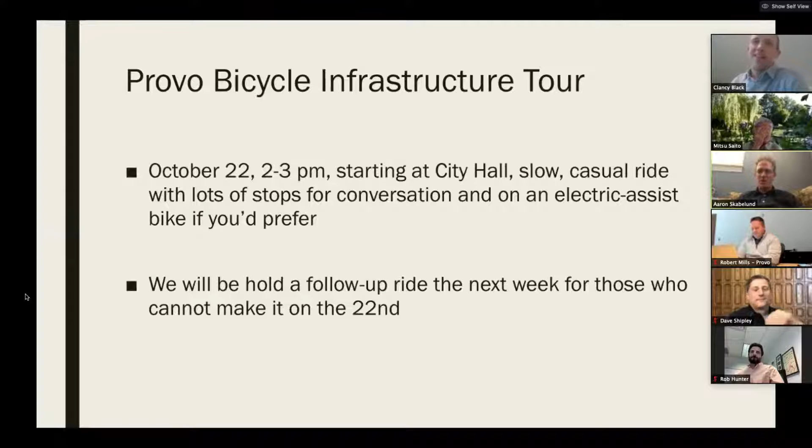Clancy, do you want to endorse this ride since you've experienced it? I actually don't know if I've been on the organized ride. I've been on all the roads you tour regularly on my own. Okay, so I will endorse the activity for sure. It's worth seeing on a bike. I know we've talked about you participating, so I hope you can join us this time. If you need an excuse to go get some fresh air on a beautiful fall day, this is your chance.

I think it's important for us to agree on the desired outcome for 200 East. What is the ultimate vision? I have a number of quotes, and anything you see in quotes comes from a document commissioned by the city from a group of consultants. This document is called the Provo 200 East Bicycle and Pedestrian Improvements Design Guidance. I'm going to take a moment to read these opening paragraphs, and I hope that we agree as a bicycling community, as neighborhoods, and as city officials, and as an advisory committee about what our ultimate vision is, because if we don't agree on these things, we're not going to get there.

So the importance of a low stress bicycling network, which 200 East is a part of. Low stress bicycle facilities like bicycle boulevards, that is 200 East, shared use paths, think of the Provo River Trail, separated bike lanes, no longer the future Bulldog project but the Cougar protected bike lanes, appeal to a more diverse cross-section of the public than conventional on-street paint-only facilities like bike lanes. For example, 700 North, 800 North, I'm sure you're familiar with these, where the only separation between the bike lane and traffic is a line of paint, not much space at all.

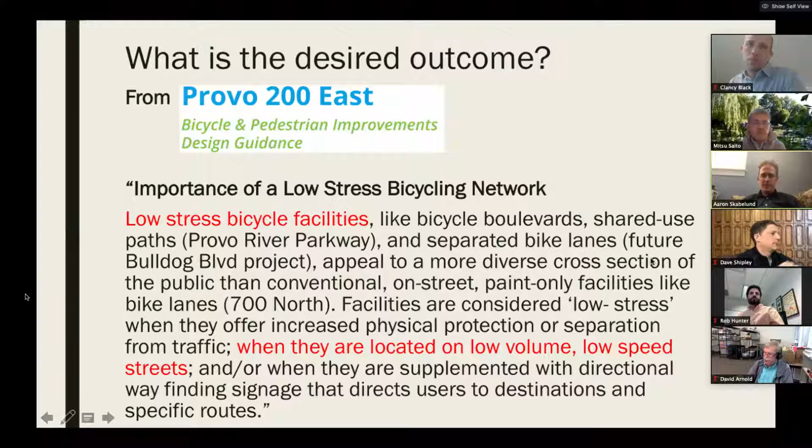A majority of the public would like to walk or ride bicycles, but are discouraged from doing so by perceived safety concerns, lack of facilities, or a lack of knowledge about where the appropriate facilities are located. Surveys nationally show that 50 to 60% of people say they would ride a bicycle more, or start riding, if they had access to facilities that provided more separation from traffic or were located on roads with lower traffic speeds and or volumes.

Additionally, evidence has shown that increasing the number of bicyclists on the road improves safety for everyone. So this is a win-win for all users of our public streets. Cities with high bicycling rates tend to have lower crash rates. Traffic calmed on-street facilities also create a better pedestrian experience by reducing traffic speeds, volumes, and possibly turning conflicts.

So I am going to assume that we agree that this is the ultimate outcome, the desired outcome. If that is not the case, then we need to have a discussion about that.

How does it reduce turning conflicts? I'll give you an example of this, for on 700 North and 200 — let's see, 700 North and 300 South. Watch for that when we get there. In some ways, at those particular intersections on 200 East, it completely eliminates turns, so there can be no conflicts if there are no left-hand turns. When we get to that point, if you still have a question about that, please let me know. Does that help?

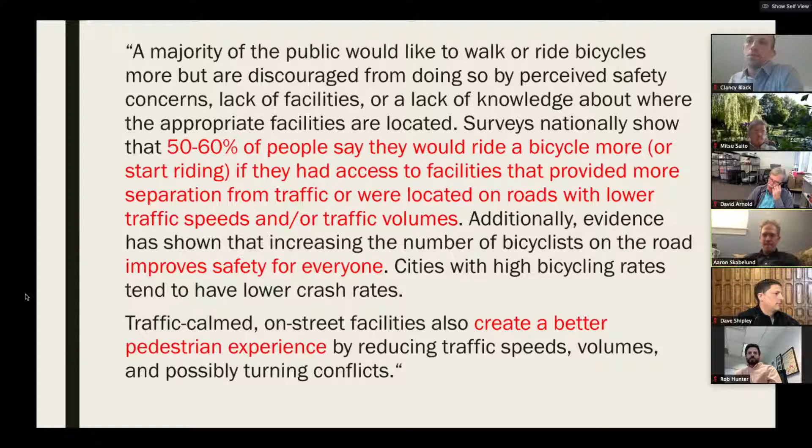Okay, so let's talk about what has improved on 200 East, assuming some familiarity of the committee with 200 East. It was identified as an ideal route from the FrontRunner station at 600 South up to the BYU campus, and to points in between. That's why the bicycling community, the neighborhoods involved, and the city itself came to a consensus that this was an ideal location for a bicycle boulevard, or alternatively, a neighborhood greenway. So what's improved over the last few years that has made this route so much better in some ways?

First off, the city over the last few years has installed these curb extensions. On the left, you can see a photo of this — I think it's 400 North on 200 East. You can see a photo from 2007, and a photo of what it looks like at the beginning of this year.

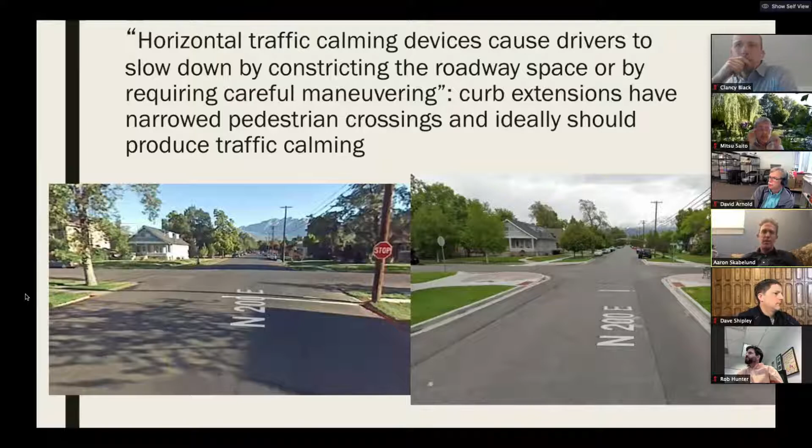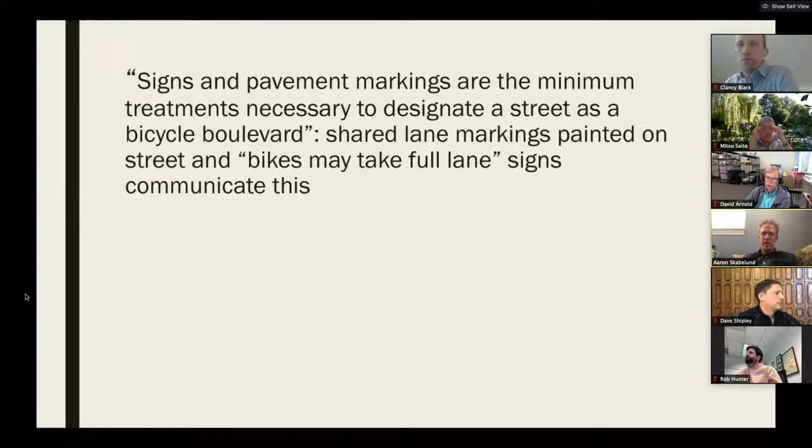Also, signs and pavement markings are the minimum treatments necessary to designate a street as a bicycle boulevard. As part of this project of building these curb extensions, the city also painted what are called sharrow markers, or shared lane markers, on the street, and posted signs mid-block going north and south indicating that bikes may take the full lane. This has helped achieve the recommendation made in the design guide.

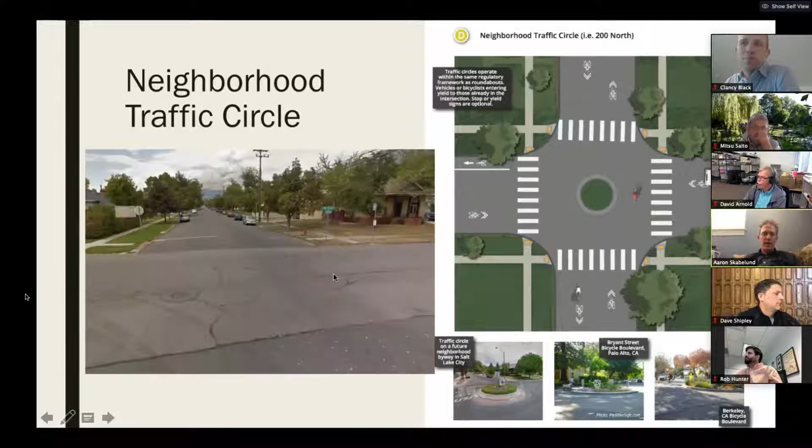Then also, the design guidance recommended that a traffic circle or mini roundabout be installed at 200 North on 200 East, and it provided some examples of what this might look like. This is what that intersection looked like before, and this is what it looks like now. Other than these photos and a little bit of text on this particular page, the design guide didn't say much more about what this should look like.

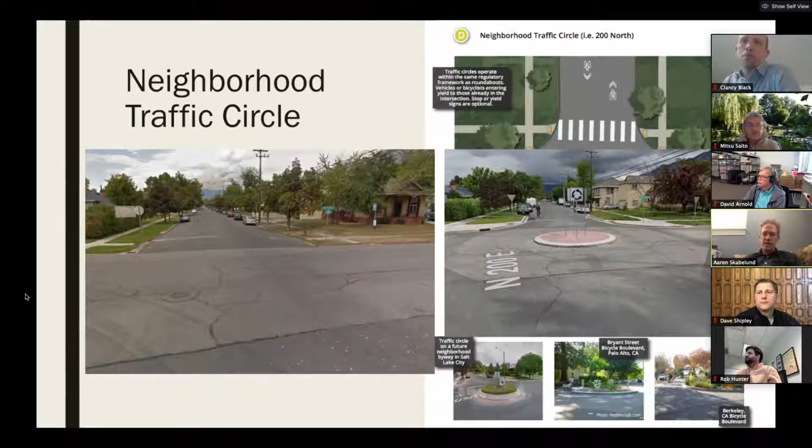Also, the guidance that we received says that 200 East is great if we develop it in this way, but it really won't realize its potential unless we make it part of a wider network.

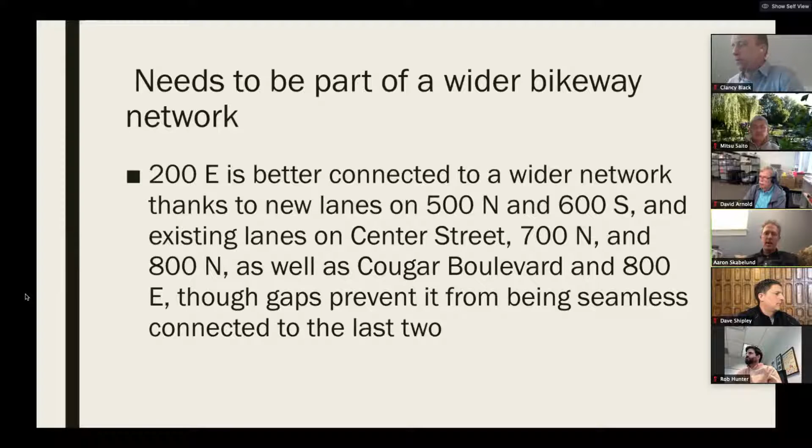In the last few years, new lanes have been installed on 500 North and 600 South, and there were also existing lanes on Center Street, 700 North and 800 North. We also have new lanes, or another bicycle boulevard, over on 800 East. But there are gaps between these routes and these new lanes, so it really needs to become part of a robust, interconnected network of bikeways.

So what remains a problem? I'm already kind of getting at that with those final comments. So let's take a look at target motor vehicle volumes. Ideally, these on a neighborhood greenway should range between 1,000 and 3,000 vehicles a day.

I don't know what they are. I don't have this data, and I hope Public Works can shed some light on this. We're certain, to speak to that earlier question, that the

traffic volumes have gone down, because on 3rd South you can no longer make a left-hand turn when going west onto 200 East. And on 700 North, thanks to the UVX project, there is an intersection like this that also prevents not only left-hand turns, but also, as you can see from this photo on 300 South, it prevents through traffic.

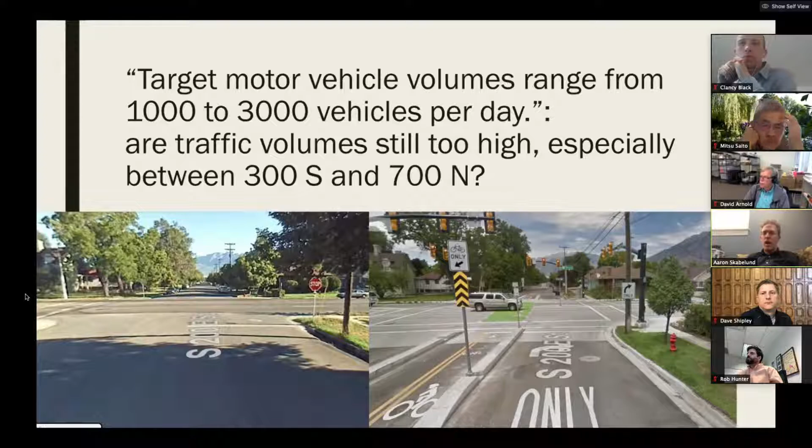But in the middle, between 300 South and 700 North, you have 10 blocks that are largely unrestricted. I suspect, and anecdotal experience shows, that traffic volumes there have not fallen all that much. I'm hoping Public Works can shed some light on this, and if they are too high still, what are we going to do?

Another goal of a neighborhood greenway is not only to decrease traffic volumes, but also to decrease traffic speeds. Ideally, the 85th percentile should be below 22 miles per hour.

The recommendation of the design guidelines is that the width of the streets between these curb extensions should be 20 feet, and if there were parking on both sides at this intersection, it could be 28 feet. The widths of the street here are actually 28 feet, so they're 8 feet wider than they need to be.

That means the lanes are 14 feet wide. So it should come as no surprise, and this data was provided to me by Jared Penrod nearly a year after these curb extensions went in, that the speed on this street has only decreased 1 mile per hour to 26 miles per hour, which means it's still faster than the posted speed of a residential road. So we're not where we need to be.

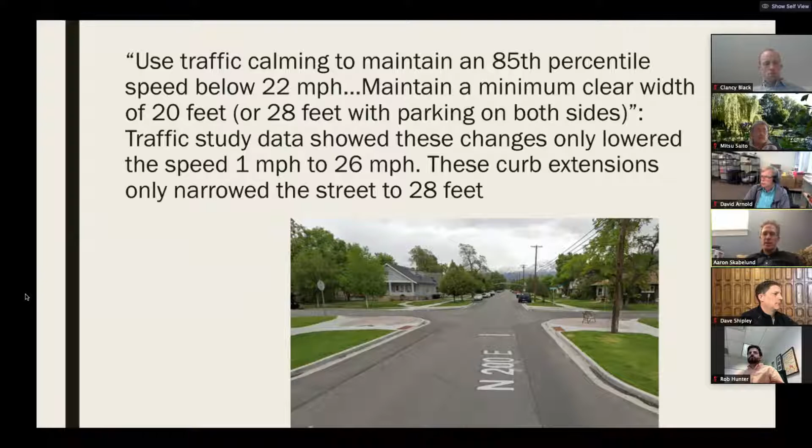It should come as no surprise that most people on bicycles, even experienced bicyclers, are not comfortable taking the lane when traffic speeds are this high. So something needs to be done to address this issue.

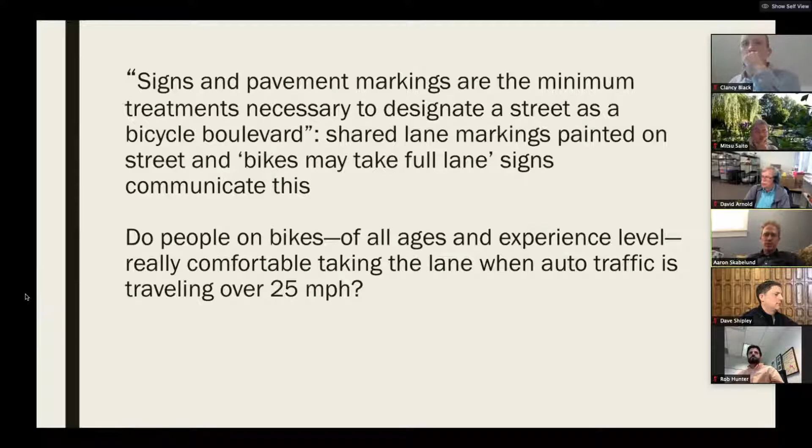I've already talked about this, that despite the shared lane markings and the signs that say bikes may take the full lane, people on bikes, particularly of all ages and experience levels, still are not going to feel comfortable treating this street as a neighborhood greenway or a bicycle boulevard. So that's a problem that lingers.

Also, the neighborhood traffic circle. The lanes around that traffic circle are 22 feet wide. I don't know what the prescribed width is; that wasn't in the design guide.

But anecdotally, from both the bicycling community and people in the neighborhood, we've been told again and again that that traffic circle feels dangerous. Just a few weeks ago, it was reported on the Joaquin Neighborhood Facebook page that there had been a car-to-car collision, and that one of the cars had gone over on its side.

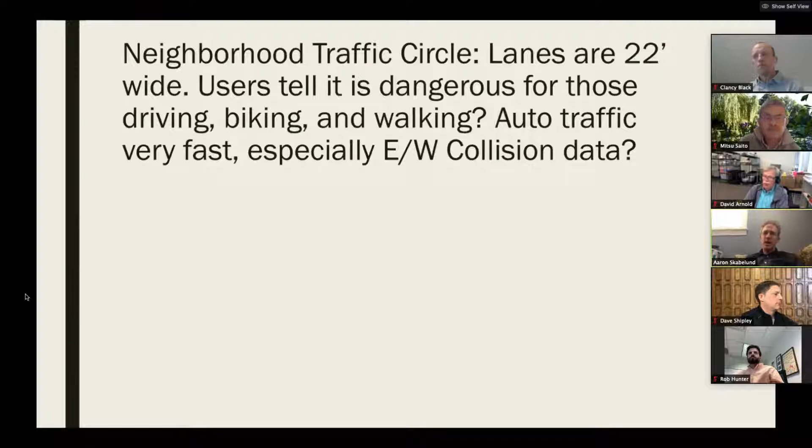And auto traffic is very fast. We've been able to confirm that, especially east-west, speeds are very high, and it's led to collisions. Sorry for that typo.

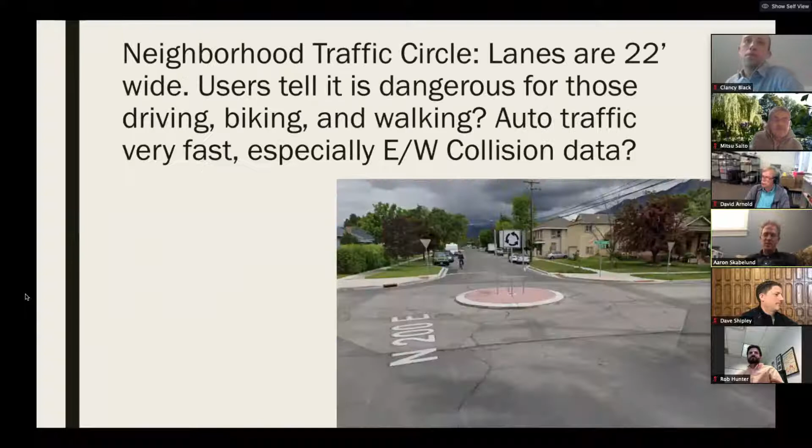I like the fact, though, that there is a bicyclist in this photo that I captured from Google Maps. So people are riding, but at a certain peril of their life, well, their limb and perhaps their life even, at sometimes.

So once again, I've already kind of alluded to this. 200 East needs to be better connected to a wider bikeway network, particularly the connections up and around BYU to Cougar Boulevard and to Canyon Road need to be addressed. This design guide also recommends lanes on 400 South and 200 North, East and West that would intersect with 200 East, and we'd like to see that addressed.

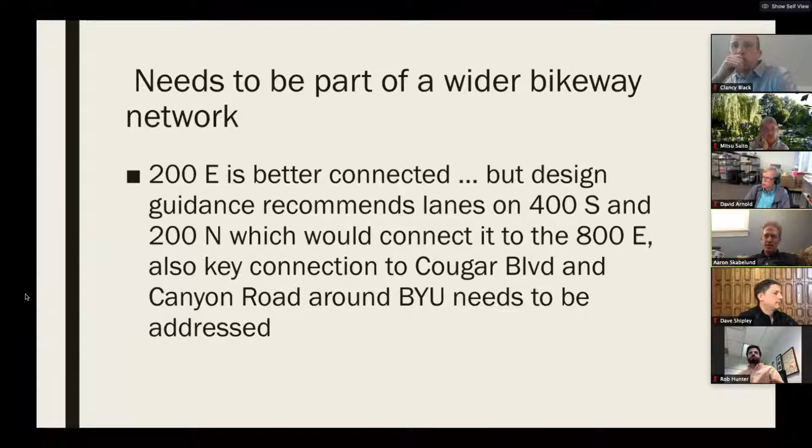All right, so let's get to the recommended solutions.

Clancy, how am I doing on time?

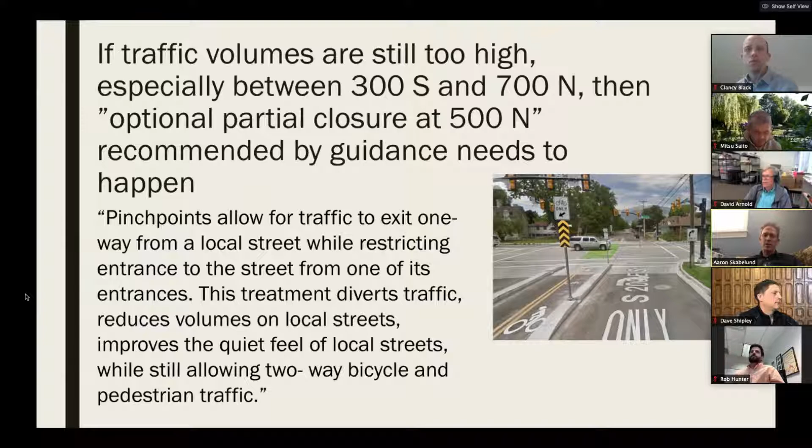I've already alluded to some of these solutions. If traffic volumes, particularly in the center section between 300 South and 700 North, are too high, we need to address that. This design guidance recommends pinch points at certain intersections in that stretch, probably just one intersection, and says perhaps an optional partial closure at 500 North might be needed, because that's where much of the traffic is coming onto the street.

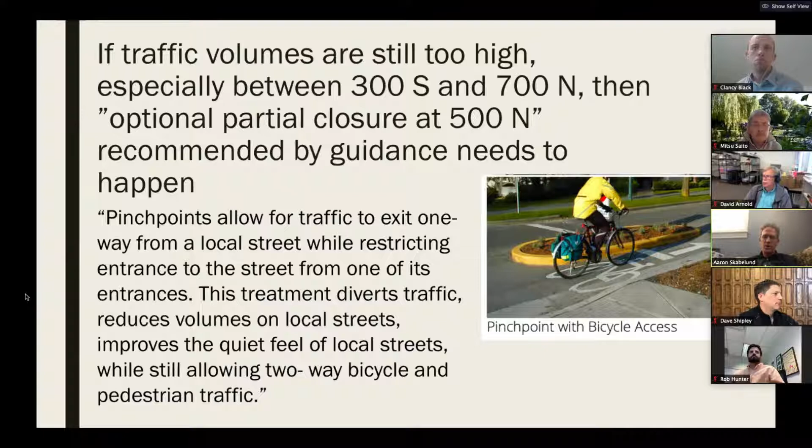Here are some examples of different pinch points. These come in different forms. This would be a partial closure, as you can see, so bikes could enter or continue on the street in one direction, but cars would not be allowed to—they would in the other direction. Here's another example of that.

The more serious problem that pinch points, chokers, or neck-downs would help address is lowering traffic speeds. It's 28 feet wide with a 14-foot lane. Who can blame people for going that fast when you have a 14-foot lane to drive in? That's the speed we're inducing by creating such wide roads, such wide widths there.

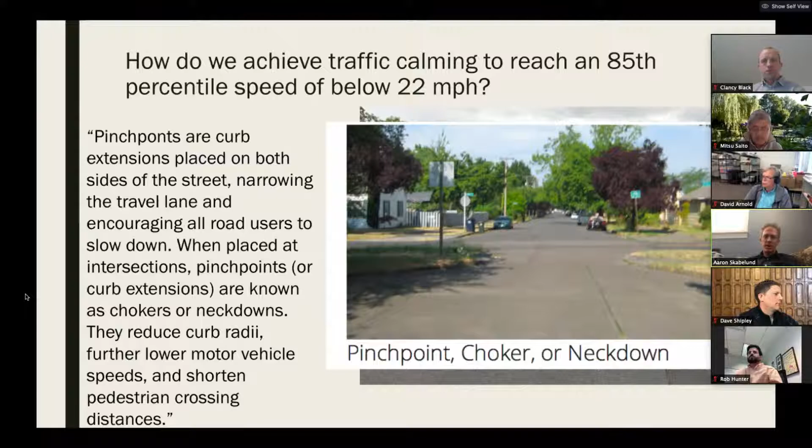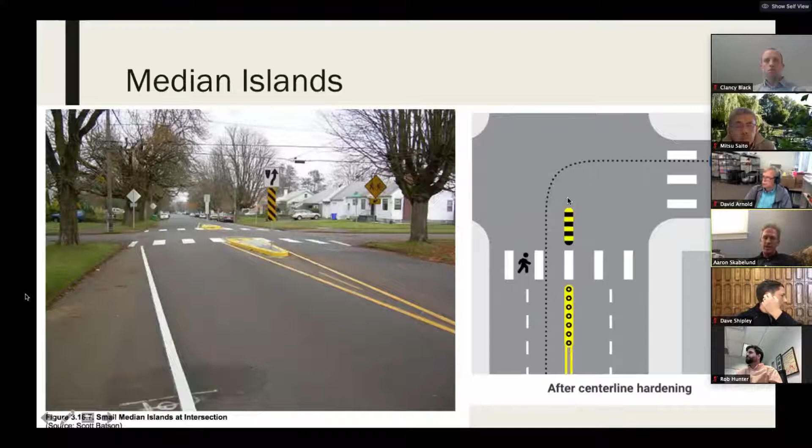These come in various forms. You could put in edge islands to further narrow the intersections, the width of the intersections. You could put in median islands, another horizontal deflection, not on the side but in the middle. Or you could do something really cheap—a little narrower—install paint and bollards partway through the intersection so cars can't make a really fast turn, so the turning radii is increased.

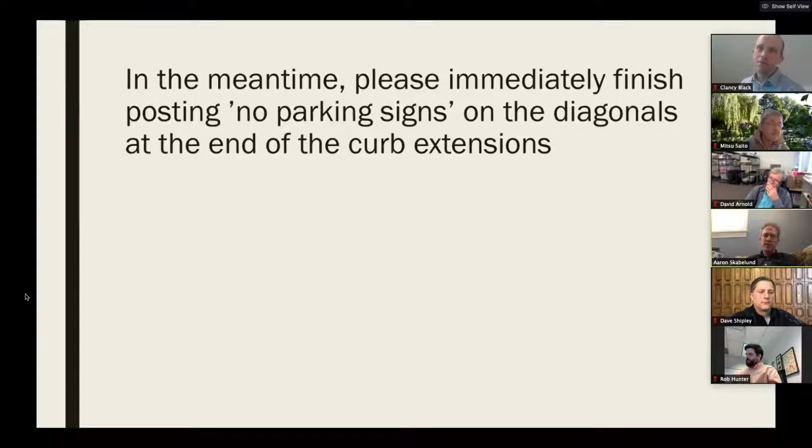In the meantime, one thing we've heard from the neighborhood is that at the diagonal areas of the curb extensions, the city has posted no parking signs so people don't park in a way that their car sticks out—which might narrow the road, but actually decreases sight lines and makes things dangerous. The neighborhood would like this addressed immediately. The city has posted some of these signs at some intersections, but not all of them.

Also, the traffic circle needs to be made wider, and the neighborhood would like reflective tape applied immediately—they say it's hard to see at night. Jared also told me, many months after it was completed, that it wasn't sufficiently wide enough, and that he recognized cars were going through it much too fast, and that this would be addressed, but that never happened.

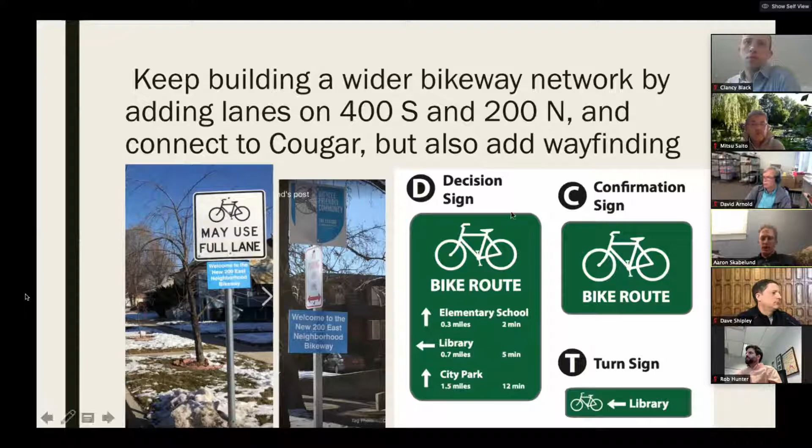This will come as no surprise: we encourage the city to continue building a wider bicycle network, add lanes, connect to Cougar, and also add wayfinding. The only wayfinding that exists right now, the only branding or identification of this as a bikeway, are signs that Bike Walk Provo put up, funded by the Utah County Health Department. We'd like something more official, like the signs recommended to be installed.

Then three final requests. One is temporary: create and turn 200 East into an open street, making temporary changes. We urge this to happen in summer because, with COVID-19, people needed space to move around—there aren't many parks in the Joaquin neighborhood—and students were coming back, needing public space and a safe way to move from campus and back. We wanted that before the semester began. It hasn't happened, and we're almost to November when students will be leaving, many not returning. But if it can still happen, I think it would be great.

More important than these temporary changes are permanent changes, such as extending these improvements all the way through the Maeser neighborhood. Right now they effectively stop at 100 South or 300 South, including the bicycle intersection. We'd like them extended all the way to 600 South, so it connects with the bike lanes that go over to the FrontRunner stations.

And finally, we'd like discussions to begin between the city and BYU to collaboratively address the 800 North intersection. This is what the design guide, and actually the 2013 bicycle master plan, envisions for this intersection. There is a lot more north-south foot traffic and bike traffic going across 800 North here than there is automobile traffic, so we should design an intersection that prioritizes that kind of traffic, and that should be a collaborative project between BYU and Provo City.

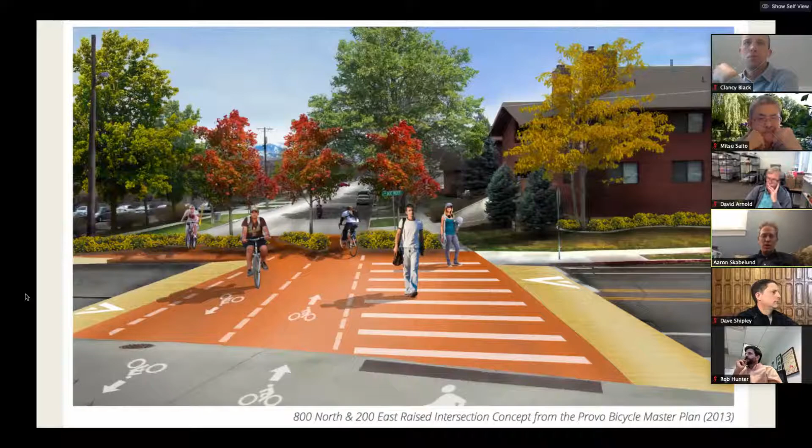I apologize, I accidentally turned off my volume, so if anybody interjected with any questions or comments earlier, I wasn't able to hear you. So that's my presentation, thank you.

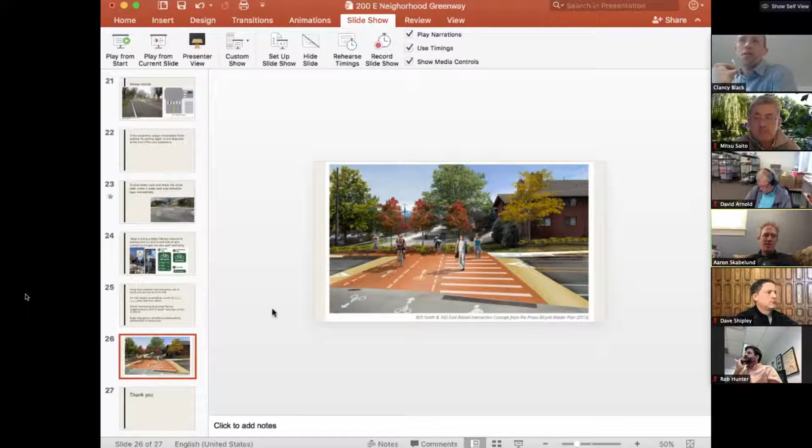Thanks, Aaron. I've got one quick question, and then I think we'll go to the Public Works presentation before we have broad discussion. You said convert it to an open street. Could you quickly define what you mean by an open street?

I should have prepared some images to show you, but throughout the United States, and actually throughout the world, particularly during the pandemic, cities have recognized that people needed a space to move around safely. So they have temporarily closed, or I would say opened, and that's often the language used, many streets. In Salt Lake, initially they closed, as you can see from this website, all of these streets, and they call these 'stay safe, stay active' streets. They began this in April.

Some of these street openings were so popular that they continued to be open. Up until August 14th there were 4 or 5 still open, and as of today there are just 2. So basically what you do is temporarily restrict automobile traffic to just local traffic, and this makes the street safe to move around and play in, run and bike in and walk in for people in the neighborhood and beyond. You put up barricades at each end and signage indicating that it's an open street restricted to local automobile traffic only. These have been a huge success in many cities and have engendered greater support for making permanent changes like the ones we are proposing.

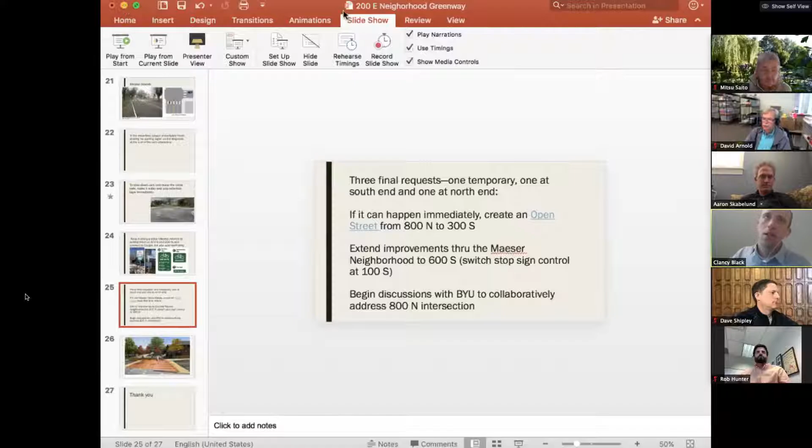Okay, let's go ahead and have the Public Works presentation now, then a progress update on the 200 East Corridor, and then have some more broad discussion on this topic with the committee.

Thanks, Aaron, for your presentation. Some of my presentation, Aaron actually went through and gave a good update on where we're at with things, so some of mine I can go faster, and we'll just put some finishing touches on where we're at right now on 200 East.

If I can— Clancy, I'm assuming it's you. Maybe it's you, Robert. If somebody can allow me to share my screen, I can pull it up. Crystal will be able to do that in just a second. Okay, try it now. It still shows host as disabled. Screen sharing on my end. Crystal, Rob is on here twice. Oh, sorry, if you have to— it looks like he just accidentally muted himself. Okay, try it now, both of them, you're co-host on both of them now. We can see it now, Rob, but you're muted. Oh, there we go, I did accidentally hit the mute button on my phone.

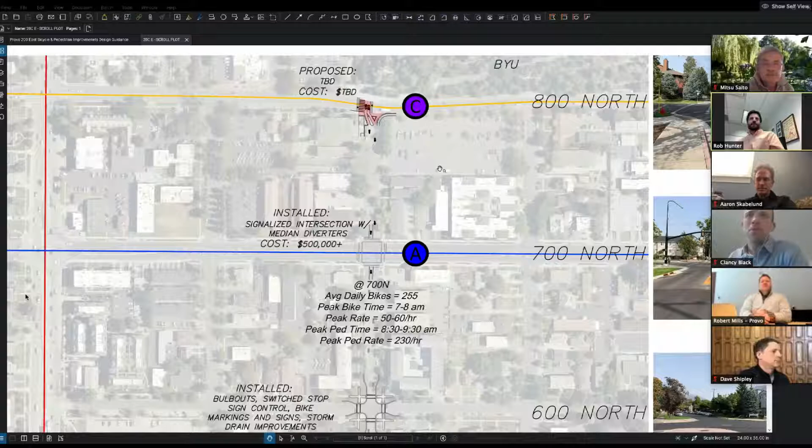Okay, so I'll just go through quickly here and touch on some of the things Aaron brought up. Starting at the north end of where we're at, we used the document produced in 2013, 2014 as part of the bicycle master plan. There was a more detailed plan put together for 200 East for the bicycle boulevard, and we've been following that plan. One of the things we brought to TMAC a few years ago, before we started the improvements we made in 2017, was that we could work towards narrowing the street, doing improvements along the entire block. This is a local street meant for a bicycle boulevard.

We can move the curb and gutter. A lot of the curb and gutter along here is trough curb and gutter, done 50 years ago for irrigation when there was irrigation throughout the city that was put down the gutters, so we could redo that. We could narrow the street and add to the green space.

The thing we brought up at that point is budget-wise, we could get a lot more done, a lot bigger bang for the buck in terms of getting the traffic calming measures in, the bulb outs at the intersections, if we focused on the intersections rather than doing the entire block.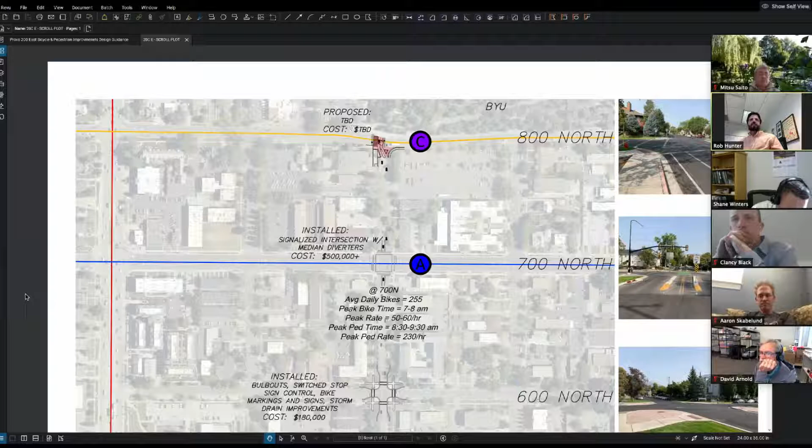I guess I misspoke when I said the long-term plan for 800 North. What I meant is we need to finalize the exact alignment and long-term plan for this intersection on 800 North, to figure out the layout and what we can do to enhance bicycle safety. So that's on hold right now until we have those bigger discussions with BYU.

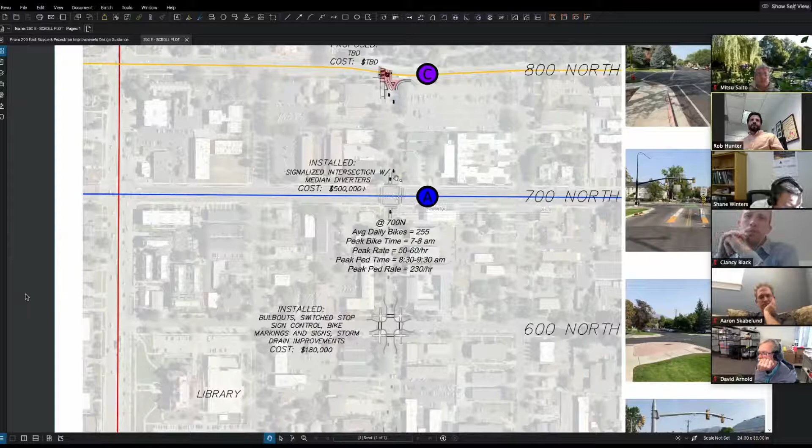700 North. The recommendation was to put in no left turn lanes. This addresses what you were talking about, David. No left turns. There's a median that only allows bikes to go through, not vehicular left turn traffic. This is a signalized intersection, so that is complete.

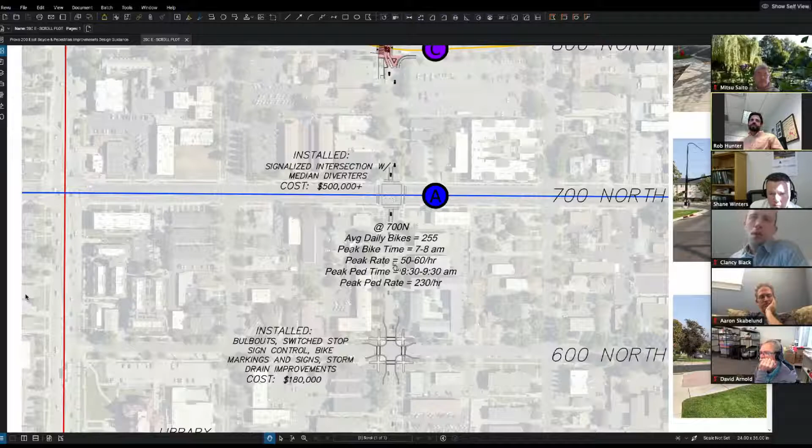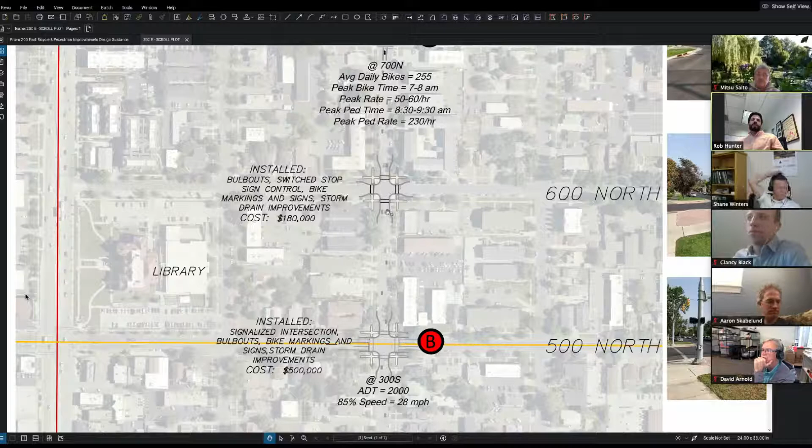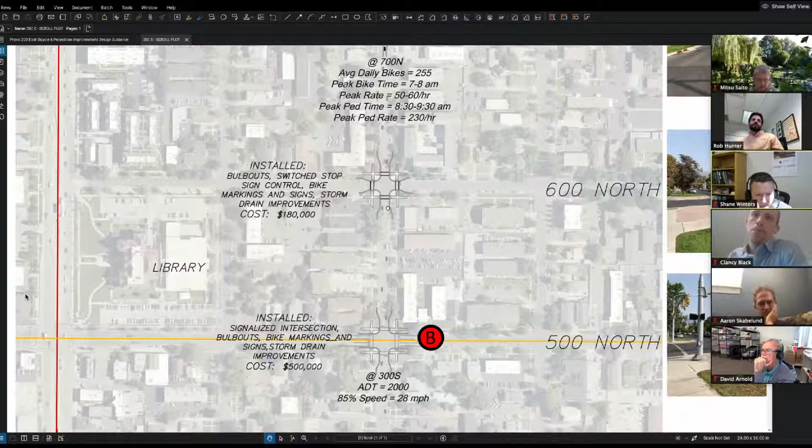600 North did not have any particular recommendation since it's local to local. It didn't have a roundabout or signalized intersection, so we put in the bulb outs. We changed the stop signs to stop 600 North and allow continuous traffic or bicycle traffic here on 200 East.

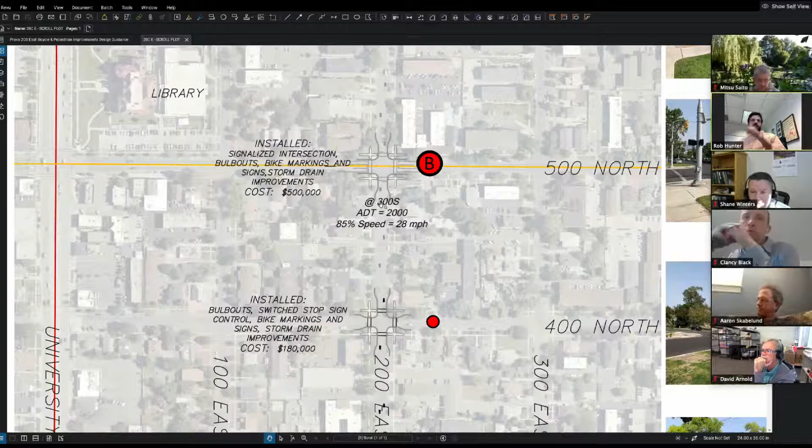On 500 North, it is also a signalized intersection. This does allow left turns, but it's fully signalized. I apologize, this answers one of your questions, Aaron - this should say at 500 North, I copied it over without changing that name. But here at 500 North, we did a study last month, and the average daily traffic was around 2,000 on the north end, with an 85th percentile speed of about 28 miles per hour.

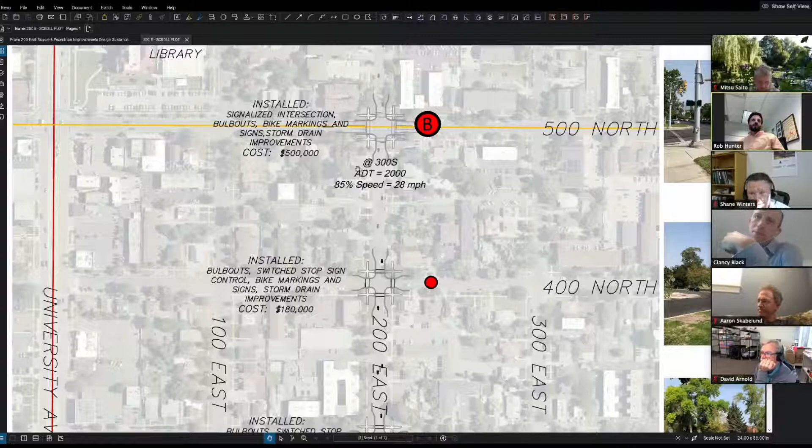So we're hitting the target. If you recall, the target for ADT was 1,000 to 3,000, and the target 85th percentile speed was 22 miles an hour. So we're in the spot where the report recommended we should be for ADT. We need to bring speed down, which is one of the things Aaron talked about.

400 North is the same thing as 600 North. Switch the intersection to stop 400 North instead of 200 East, and put in the bulb outs.

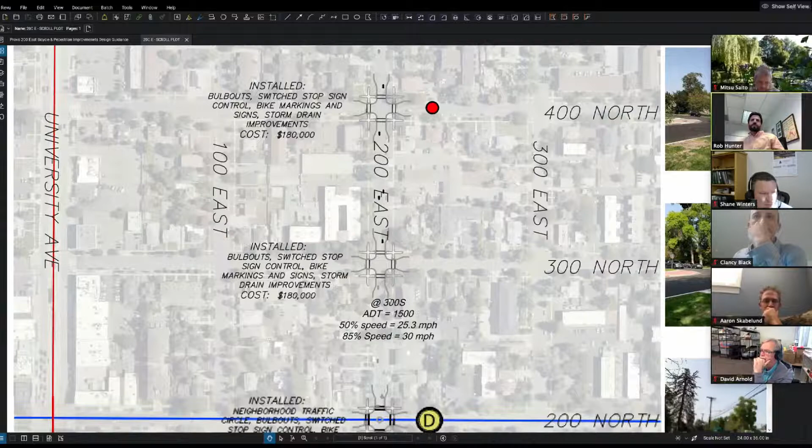One of the things you addressed, Aaron, is that the report recommended we could go down to a 20-foot pavement width. At the time, our bulb out details were 28 feet at the choke point of the bulb out. They are now at 24 feet.

I don't know who all wants additional discussion on that. I wasn't here at the time, but my understanding is there was substantial feedback on exactly how far down we wanted to go.

Yeah, Rob, there are adopted city standards - that's adopted per street sections, bulb out sections, and our standard details in the city. Those are adopted by the council. We follow what is adopted and approved. We don't deviate and come up with our own ideas on what that should be. We follow the adopted plan as far as bulb out and those specific design elements.

Is it 24 feet now, though? It is. That was one of the recent changes we made with the master plan update. We've decreased local street widths and changed our bulb out designs to narrow those down to 24 feet instead of 28 feet. So there have been some changes since then, but at this time, the design was based on the current adopted standard.

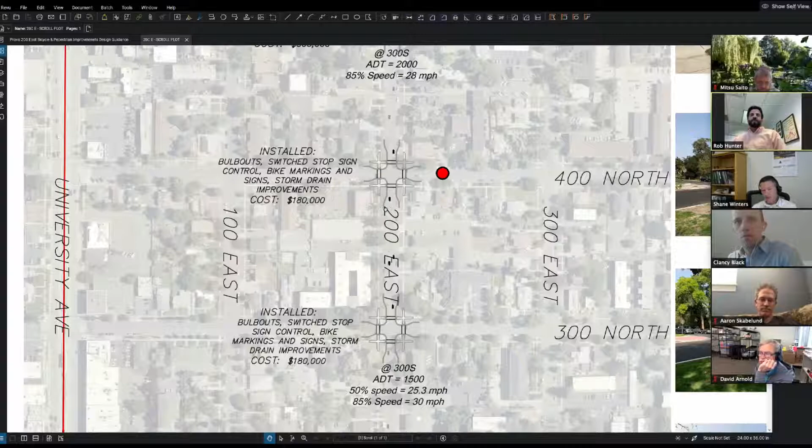Well, let's say it was. At the time - I'll have to go through and check my recollection, I was on a different team - but my recollection is that some of these were done with 28 feet. I think we had already started anticipating the adoption of the 24 foot standard. Some of these might already be 24, but I'd have to go measure. Any we do going forward on these local streets would be choked down to a 24 foot pavement.

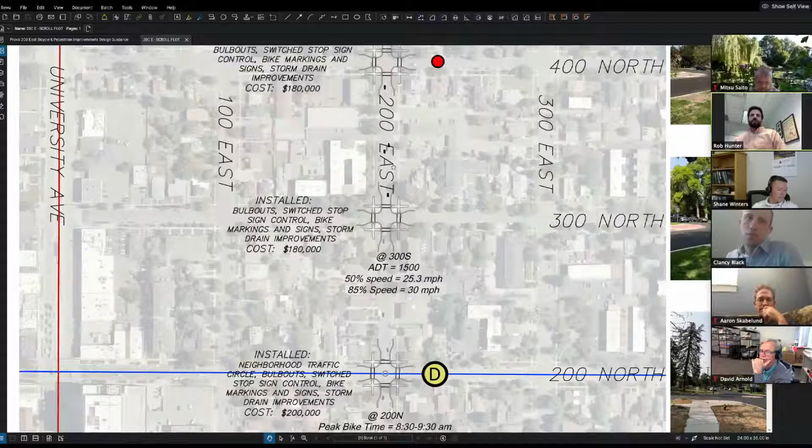I'll throw in my two cents on the topic. I don't know if it's 24 or 20, but I think it's really good that it was reduced from 28. I ride 200 East at least once a week, and the first time I rode it, my reaction was that these should be narrower. So I think it's good the standard's already been reduced, and I appreciate that. I think that was a good move for everyone.

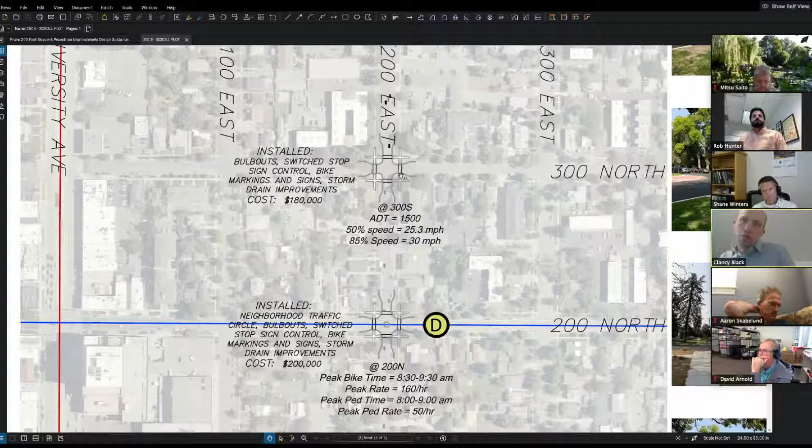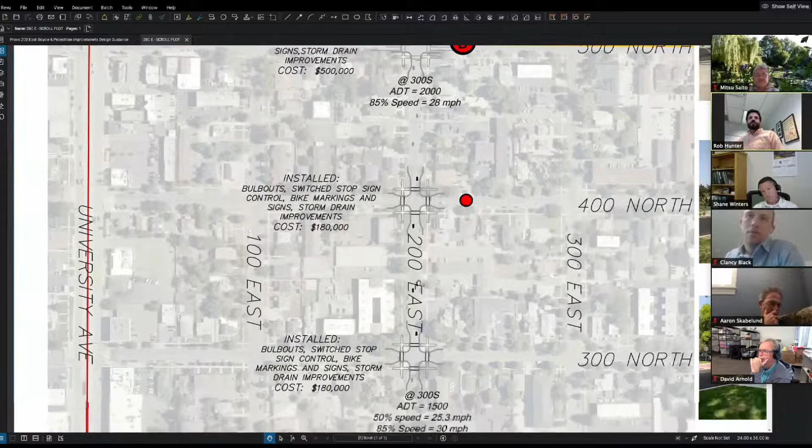At 300 North, we've got the same thing as at 400 and 600. The stop signs were switched to stop 300 North traffic and allow continuous traffic on 200 East. 200 North is this traffic circle there.

For a full-on roundabout, which is a much bigger, more substantial item, there are no standards to follow for these neighborhood traffic circles. This was the city's first neighborhood traffic circle, and as Aaron already mentioned, we recognize that these probably need to be more substantial. So going forward, we would make these more substantial, choke this down a little bit more.

This was brought up just a week or two ago, and I need to see exactly on these—the design recommendations are pretty set for full-on roundabouts, but just to see what the minimum lane width is that we could put through here with these type of turns and still get trucks through. But we took it down as much as we could.

What we choked that down to is because Second North is a collector street, we still needed to allow bus type or school bus movements. So the design vehicle turn movement to make that happen was the bus. Our typical design vehicle is much bigger than that, but the circle was sized to accommodate a left turn movement for a bus.

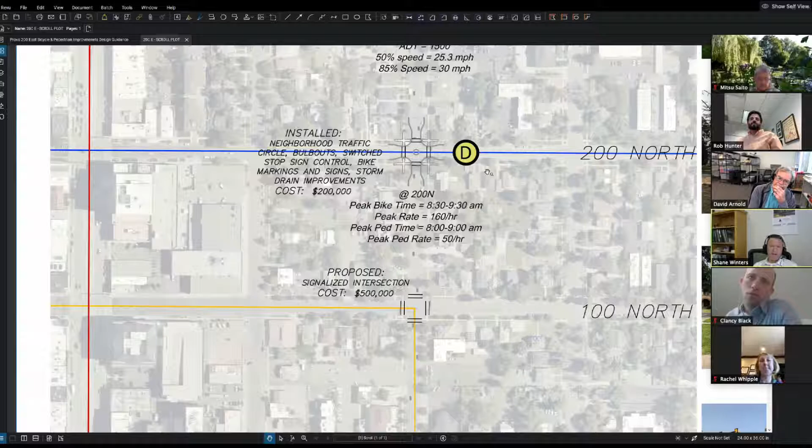One of the things I agree with too is the nighttime visual. I think that's something—as far as I know, this is the first one of its kind in the city, maybe in Utah. I'm not sure where else there are in Utah, but this is one of the only ones I know about. So this is something where we're still trying to figure out the right sizing based on the condition, what is meant for that facility. That's one we're still experimenting a little bit with.

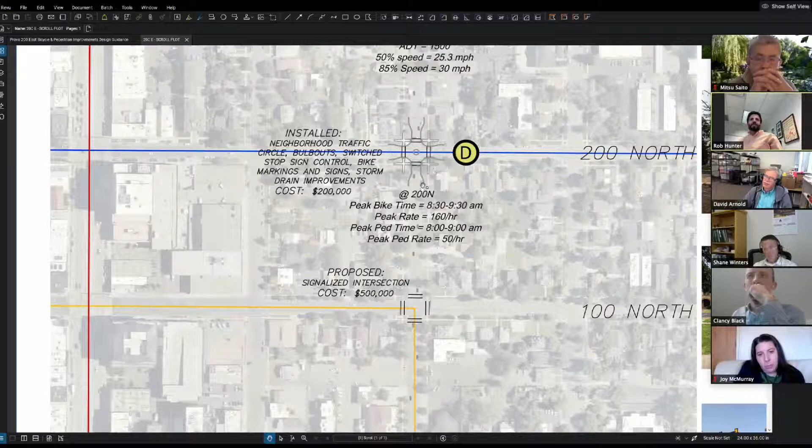One of the things we can go out and do—this was striped with yield arrows before we get to it—but we can go out and stripe the crosswalks here too. I think that would bring a better visualization to everything and let people know they need to slow down through here. That's an easy addition.

So that's 200 North. 100 North—the original plan was to put the bulb-outs like the other local to local connections, but we took that out. Derek took that out partway through the project, because as we were moving along in the transportation master plan, one of the things that became a focus was taking cars off of Center Street. So the decision was made that 100 North will become the arterial.

I've met recently with some council members, and we're having discussions about Center Street and kind of the overall vision. One of the visions being brought to our attention from the council is that they do feel we need to divert traffic from downtown Center Street over to First North. As we've let them know, in order to do this—and I think they're starting to see that—something needs to happen between Center Street and 100 North along 200 East.

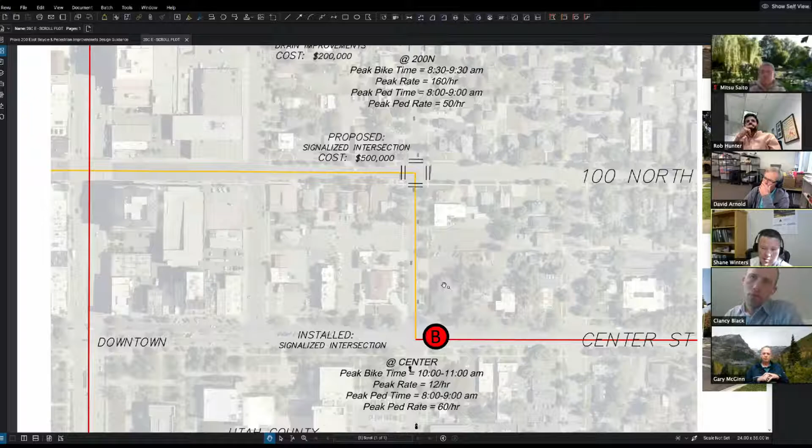The reason Gary and I bring this up is because the Provo 200 East bicycle and pedestrian improvements design guide that we in Public Works have followed, and that Rob is going through to show you, this would be a change to that plan, and we've let the council member know this would be a change to that plan.

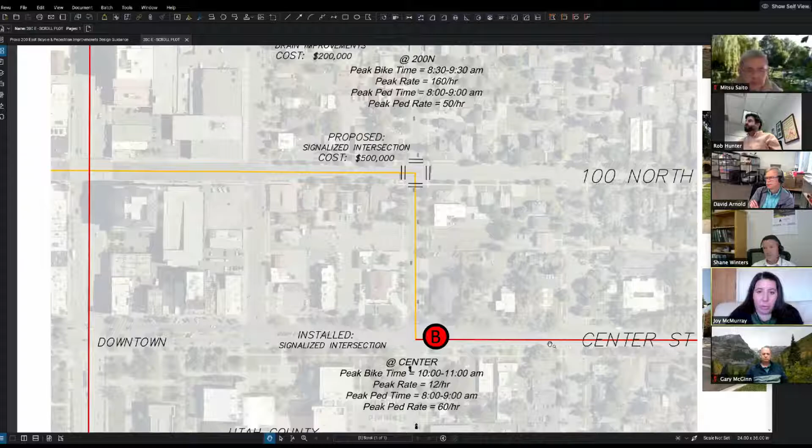I wanted to add that I welcome this discussion about this very important intersection at 100 North and 200 East, because it ties into everything we've been talking about with Center Street. We'll have to be really wise in designing that intersection to accommodate both the bike boulevard traffic, and we want to make it easy for cars to go there so they won't choose to take Center Street. So I am excited to continue that discussion in the future.

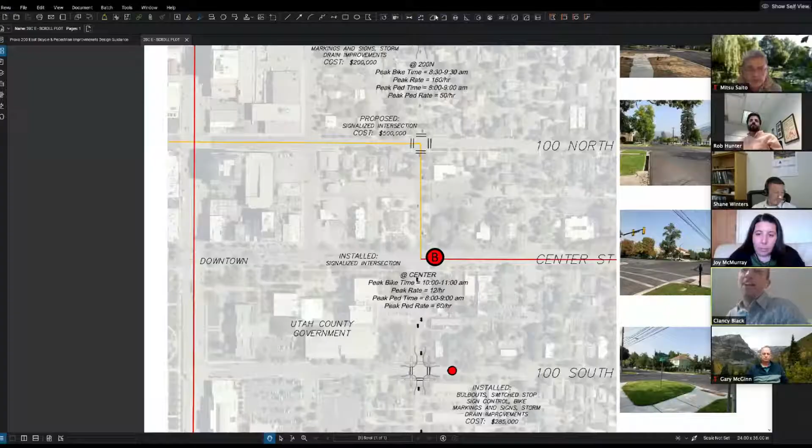Yeah, I want to second that, Joy, and I'm actually going to share my screen for a second. Rob, I think you can keep sharing. Crystal, could you give me permission to share for a second? I'll stop sharing here. You should be able to, Clancy, but let me make sure. There you go, there we go.

I want to share just a concept to keep in mind. Do you all see that Google map now? This is American Fork, all of you have probably been through this. I think we need to give serious thought to not just a signal at 100 North, but something more like this. And Clancy, that's absolutely kind of some of the design, higher level discussion ideas that we're having with the council.

I think what we've got from there is kind of the initial take from the few council members we've had discussions with: right now we'd like to see somehow to get that commuter traffic from Center Street over to First North.

These ideas right here would be some of it, we had the state, we had UDOT there, letting us know from their perspective of being involved that we're talking about discussions of changing the 500 West Center Street intersection. That would be looking at some change to turn movements and those kind of things. So we're starting that dialogue, but we want to go through the appropriate process, through the council, through TMAC, through the public, to implement those changes.

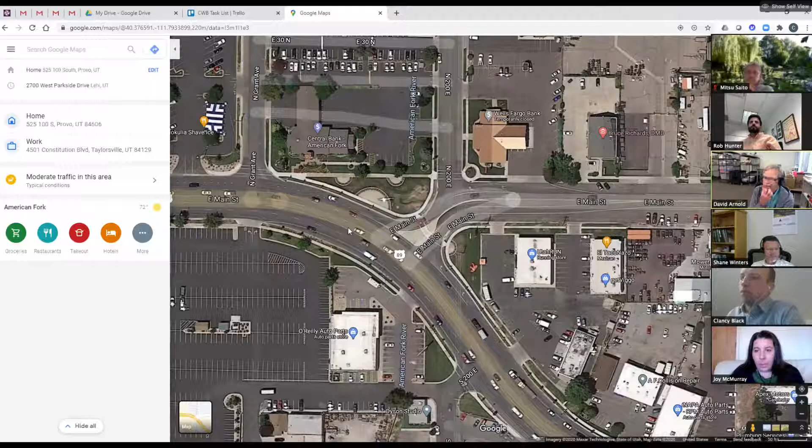I think the one thing this highlights for me, I get all of that and I agree with all of that. But I agree with Aaron, this kind of messes up our bicycle connection to the front runner. So as we do this, let's not forget that we've got to connect, because we built this 200 East to be a bicycle corridor, right?

Well, and with a goal to get it connected to the front runner station. And so now we've absolutely... And that's why we brought it up. As I said, the things that we do are going to have a direct impact on things that we've already done or plans that we already have in place.

So there has to be that understanding. Right now, we just need to understand, maybe from the council's vision of Center Street, if that's the vision, then if 100 North is the vision, then we can start developing plans, what the impacts are, what we need to do to accommodate other plans. 200 East would be part of, absolutely be part of that discussion.

Can you guys remind me why we can't choose 100 East to be that commuter transition point between 100 North and Center Street, and then we could preserve our bike boulevard on 200 East? Why can't we use 100 East to be that little one-block connector piece?

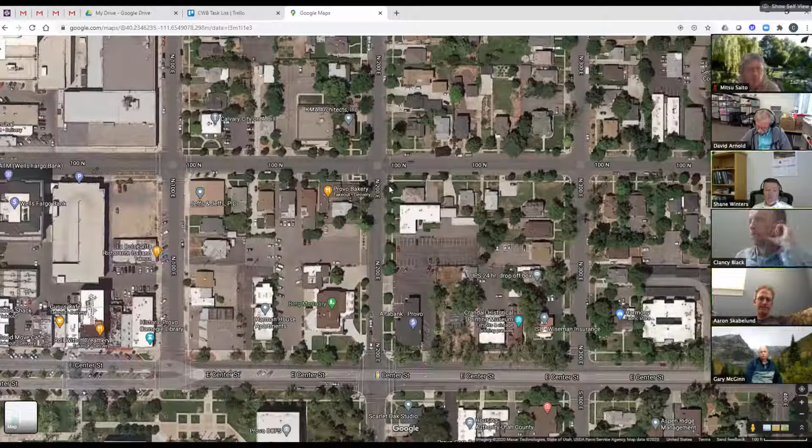Possibly. Again, like I said, University Avenue—left turns are all cut off at University Avenue. The pedestrian mall is defined to 100 East, and then there's the transition area.

We need to be very careful with our east-to-west corridors—we're already kind of suffering there. Yeah, we've got to maintain those. Absolutely, but I think we can find solutions that meet all needs.

In the scenario I presented, where this is more of a forced turn, if we give additional treatments on this block so bicycles feel safe and only bicycles can proceed directly north, all of a sudden you've improved east-west mobility and you've cut off traffic.

That's actually, Clancy, where that becomes a free left, right? We start to be a signal and we become a free left, solving both problems. We can start looking at those options. Right now we're not proposing anything to say this is the right idea—what we're looking for is help defining the objectives.

Yeah, okay, I had a question for Rob. We'll probably solve the Center Street problem for a few years. When you looked at the speed on 200 East, were you looking mid-block or at intersections? I'm wondering, is it slowing down at intersections and then speeding up mid-block? Do you have any idea?

Where were the test locations? Were they mid-block when you did the tests? So the tests are at mid-block. They're more towards mid-block, and the reason for that is typically at intersections they're a lot slower, where mid-block, between intersections, is where you get your highest speeds.

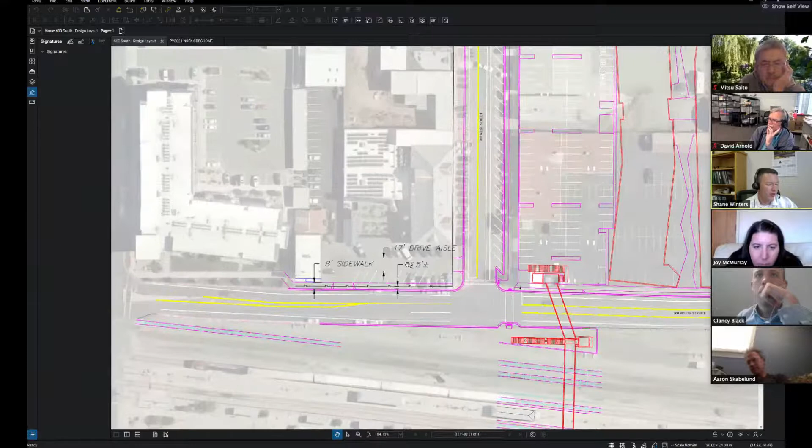We're also looking at getting improvements along 100 West on the west side of the road, and some curb and gutter improvements along 6 South. In order to tie this together with the mill race project's first approved phase, we're getting sidewalk improvements on the north side of 6 South and east side of 100 West, per the adopted 100 West plan. One project we're looking at funding is pedestrian sidewalks to help tie this together with the bridge anticipated to start construction next year.

Shane, has all the purple and red been approved on that block? This would be the layout of everything laid together as approved, the design that would move forth. The mill race project on this block has been approved, and they'll start construction when they move forward with the whole block. That's what they're building. What I don't have is the stuff on 6 South west of 100 West, and I won't have the improvements on the west side of 100 West. So we're trying to move forward with those improvements so we can tie this together and make it safe for use.

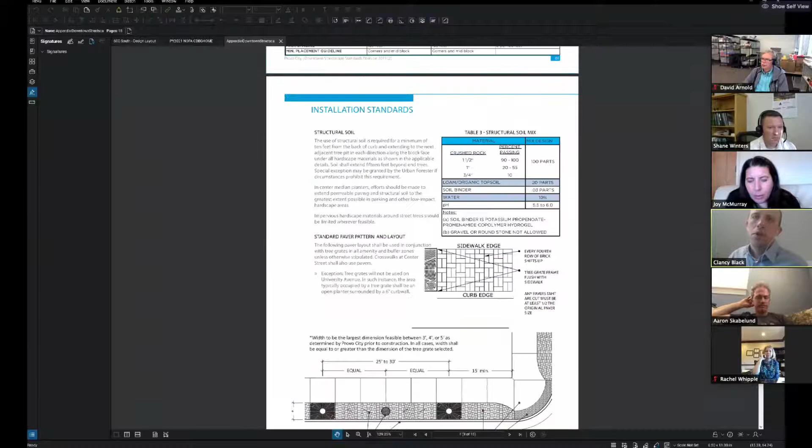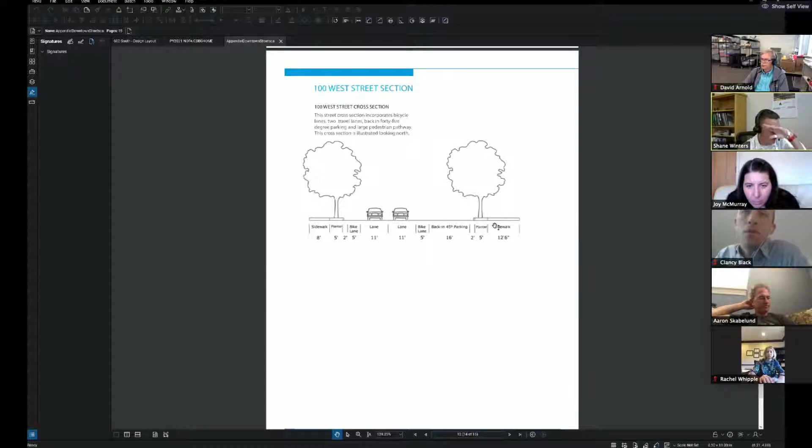So Shane, are you saying CDBG funds are proposed for the west side of 100 West only, and Mill Race is making all the improvements on their block? Yes, that has been approved, and they will be constructing the east side. This is 100 West Street from 6 South up to 100 South. This is the approved typical section, so this is what's being followed. This is what we want to get on the west side of the road. We want to start getting those facilities in so we can start tying this together.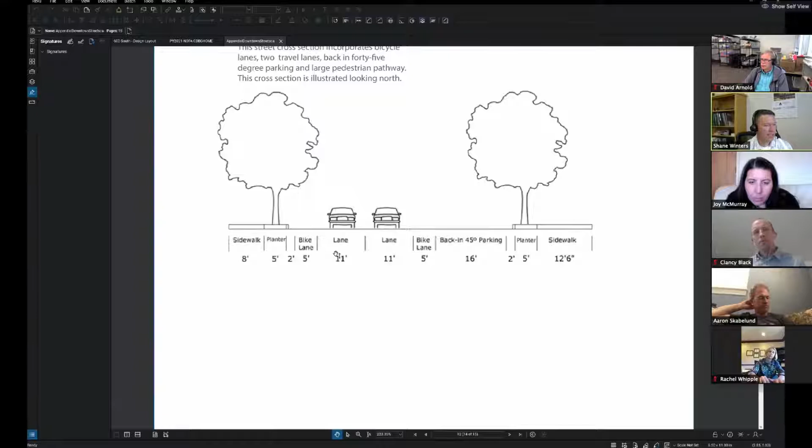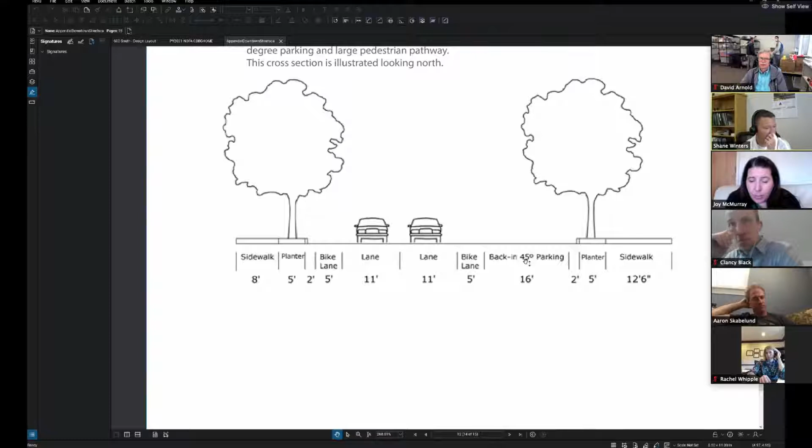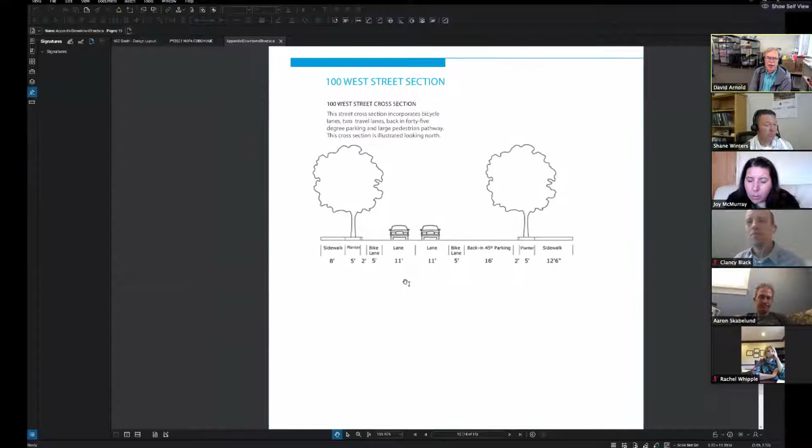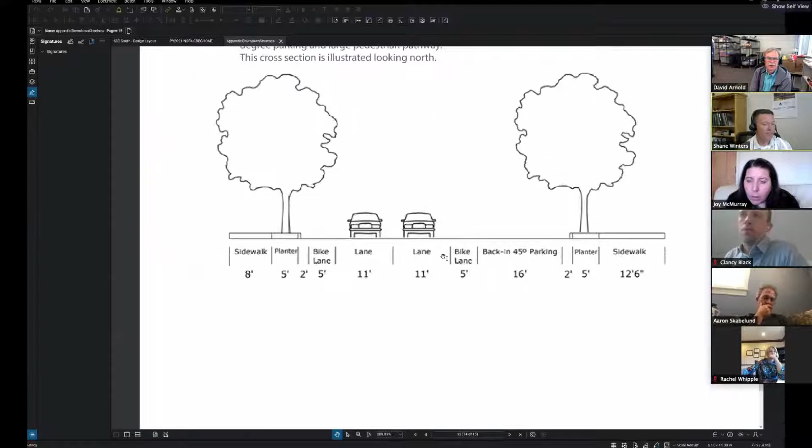And those bike lanes are separated by paint only, correct? So there's only a bike lane on the west side? Yes, there's paint here on the bike lane. On the east side of the road we'll have a bike lane and back-in angled parking. You know, and then we have a really wide sidewalk on the east side, and an 8-foot walk on the west side. What's back-in angled parking? So you pull forward and back into it? Yes, you come in and actually back in. Does that eliminate the hazards with the bicycles? That helps eliminate it. That was always part of the discussion, since putting parking with bike lanes is an issue. This is kind of what got determined, because it was decided parking was a priority for this area.

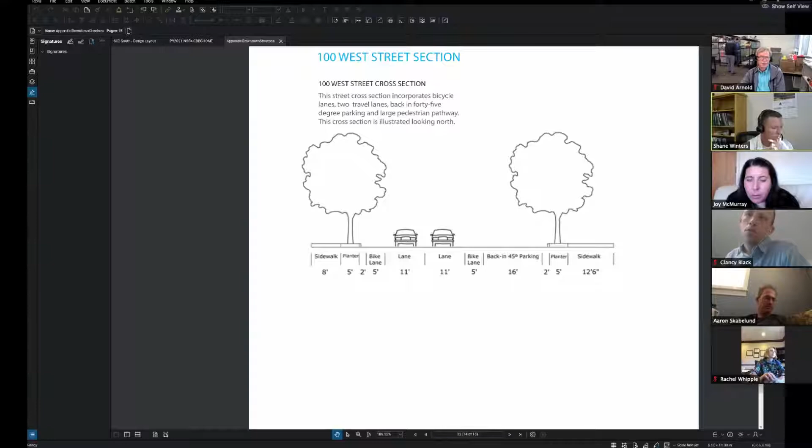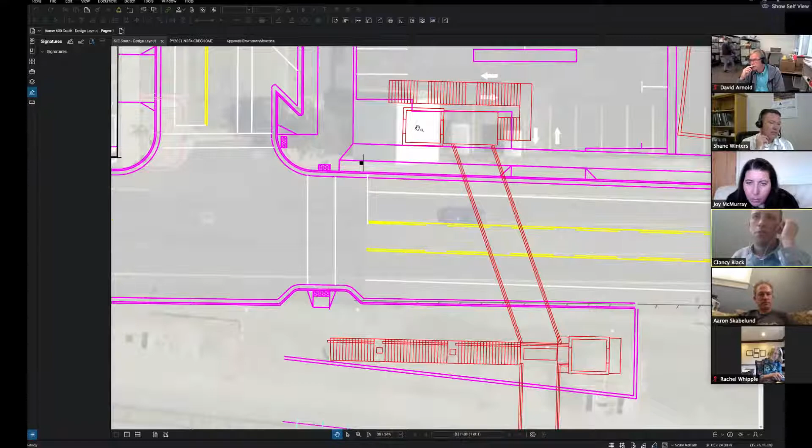And Shane, did you say we have funding for the part of the bridge that goes over the tracks, but not for the part that goes over the street? Yes, correct. So let me go back to the design. What we have is touching down here with the elevator and the stairs - this is what will be constructed. This here is future - some kind of pedestrian path over. That's the discussion, and it would probably only serve the residents of Millrace. That's a discussion with Millrace, tying that all together.

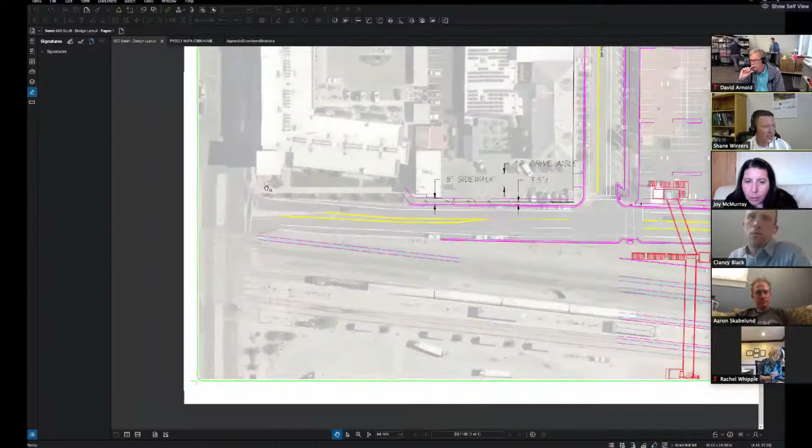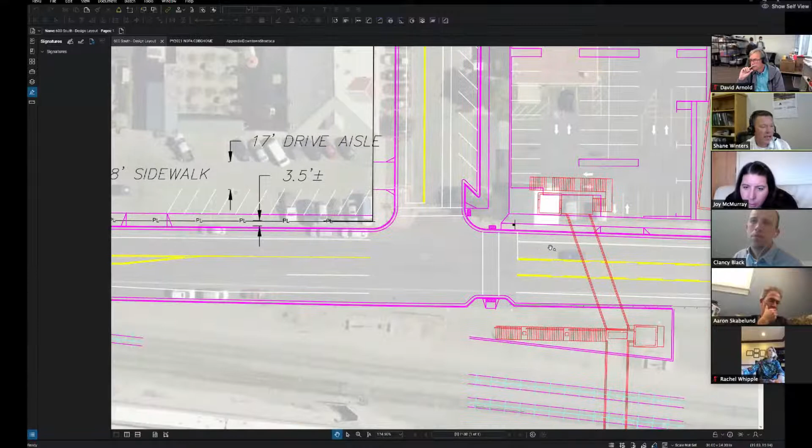So how do people get safely to the planned pedestrian and bike bridge? That's what we're trying to implement with the CDBG funds - we need to get this sidewalk in from 2nd West over to 100 West. The other improvements we want are up at 5th North, so people can get from the west side down 100 West. But at the same time, at this intersection crossing, we want more than just a painted crosswalk - looking at other solutions like a flashing beacon, though we haven't decided yet. That would be part of these funds. So I don't see anything on the south side of the street, correct? No, on the south side we'll be eliminating all the parking - we don't want parking to be distracting.

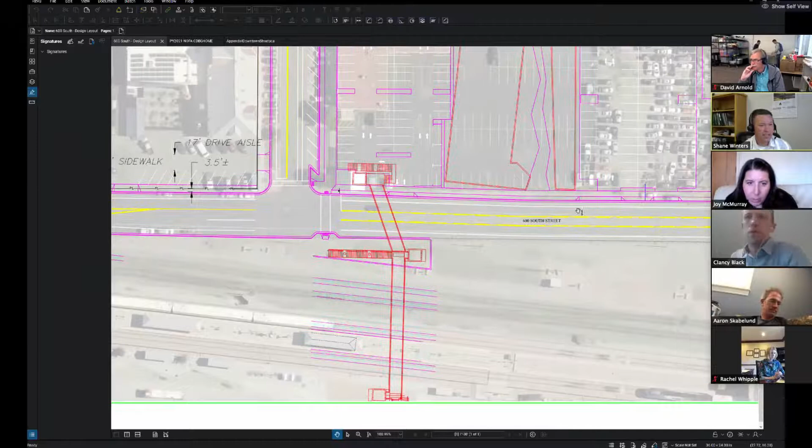That will be the bike lane, a dedicated bike facility all the way down 6 South, similar to the north side. What this does is it ties over to 2nd East, tying that facility, that bike boulevard, with UTA, to get safe access to that transit facility.

Because we do have issues crossing here at 2nd West - massive, right? And so that is part of an overall solution.

So what I'm saying is, what is a higher priority to TMAC? Is it to continue the 200 East improvements, which is in this bicycle plan, which we're okay with? Or would it be this? This is one we're proposing, these improvements.

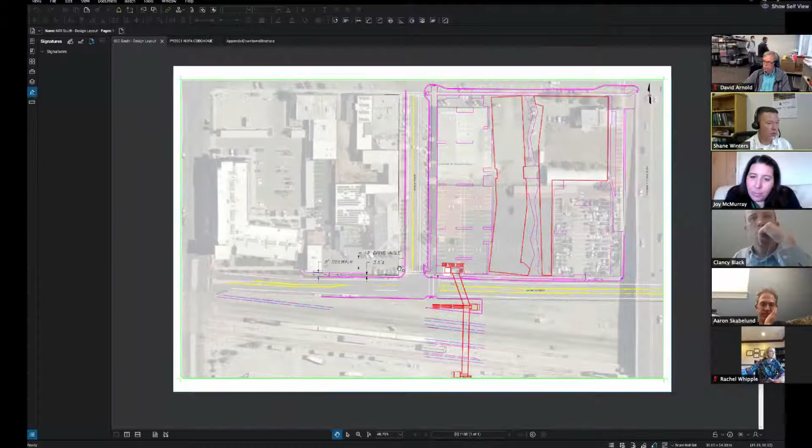The other one we wanted to bring up is the Franklin neighborhood. This has been a neighborhood that I think they feel like they've been neglected. They are in the CDBG zone. We do have a lot of areas in the Franklin neighborhood that have missing sidewalk.

We have a lot of complaints about broken sidewalk, difficult to walk, those kind of things here.

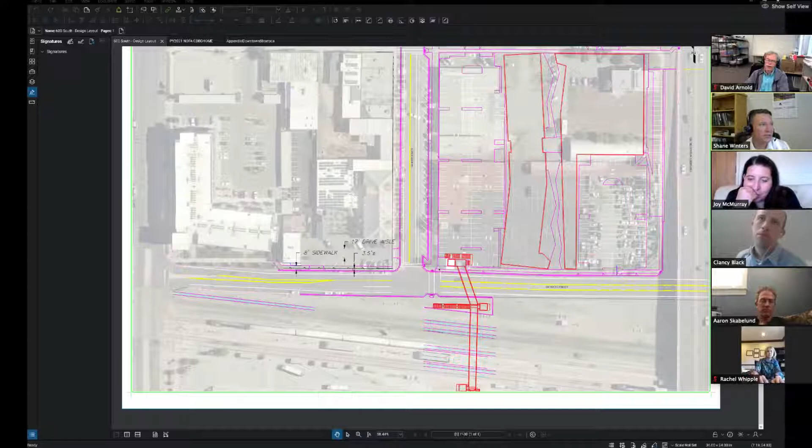So I brought up just an overlay quickly of the Franklin neighborhood. Can you see me? We still see the ped bridge. All right, let me bring that up. Share my screen. Let me share again. So let me bring up Google Earth. Can you see that now?

So there's a substantial amount of utility issues in order to get those areas in. Just those three areas, you're looking at about $700,000 to do. What we want to do is spread this out as much as we could through the CDBG funds, and then leverage some of our funds designated in Public Works for sidewalk and concrete improvements.